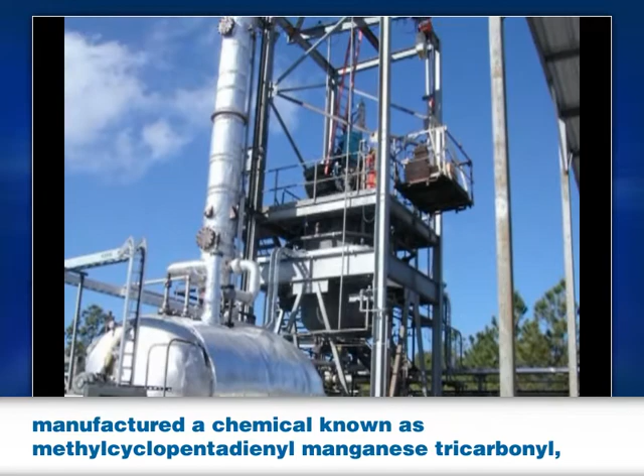Behind me on this concrete pad, there used to stand a structure some 50 feet high that had a reactor vessel in it, in which the company that operated here, T2 Laboratories Incorporated, manufactured a chemical known as methylcyclopentadienyl manganese tricarbonyl, or MCMT for short. The entire structure and reactor vessel were blown away in the explosion.

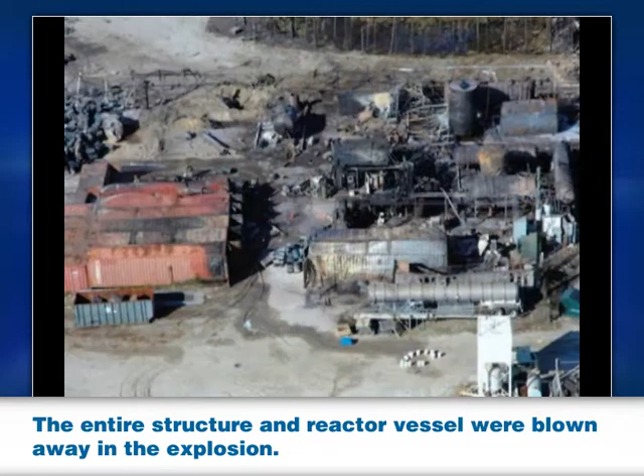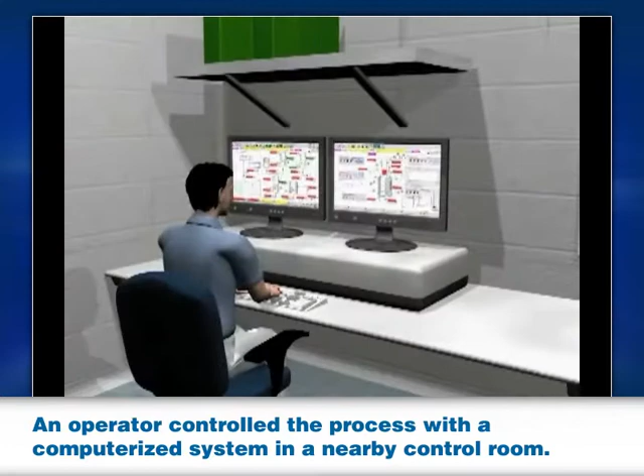T2 produced MCMT, a gasoline additive, in batches using a 2,500-gallon reactor. An operator controlled the process with a computerized system in a nearby control room. In the first step, liquid chemicals and sodium metal were loaded into the reactor, heated, and then mixed with an agitator.

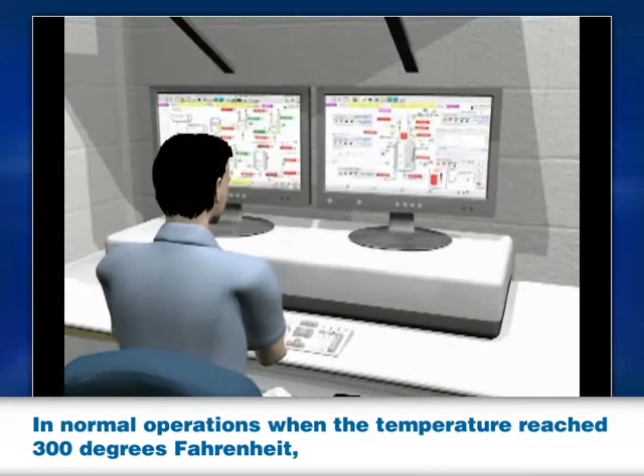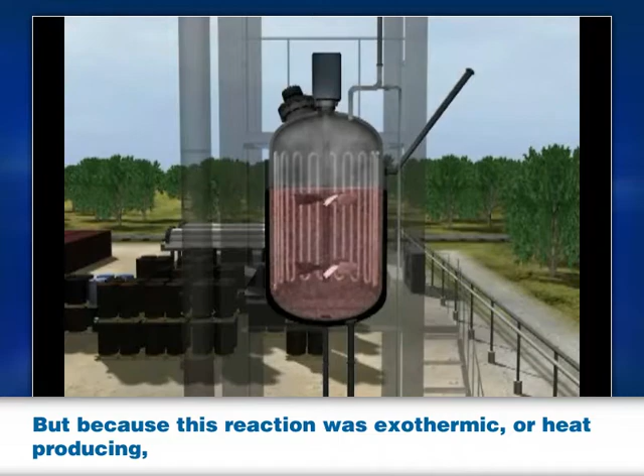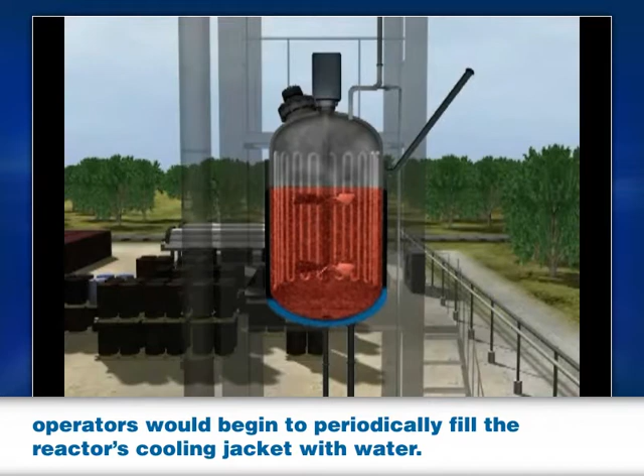The reaction produced hydrogen, which was vented to the atmosphere. In normal operations, when the temperature reached 300 degrees Fahrenheit, the operator would turn off the heating system. But because this reaction was exothermic, or heat-producing, the temperature inside the reactor would continue to rise. At 360 degrees, operators would begin to periodically fill the reactor's cooling jacket with water. As the water boiled, heat was removed, controlling the temperature.

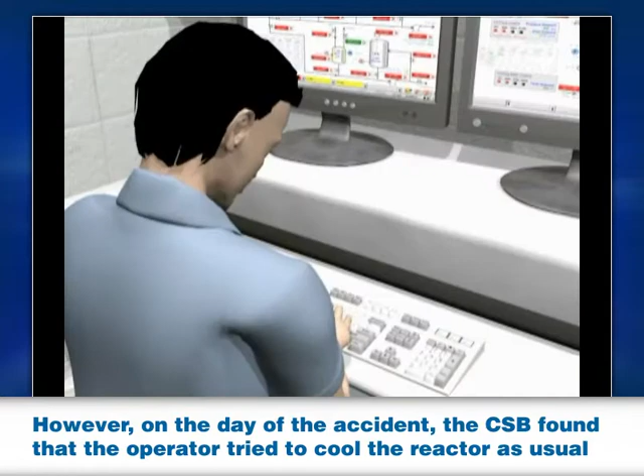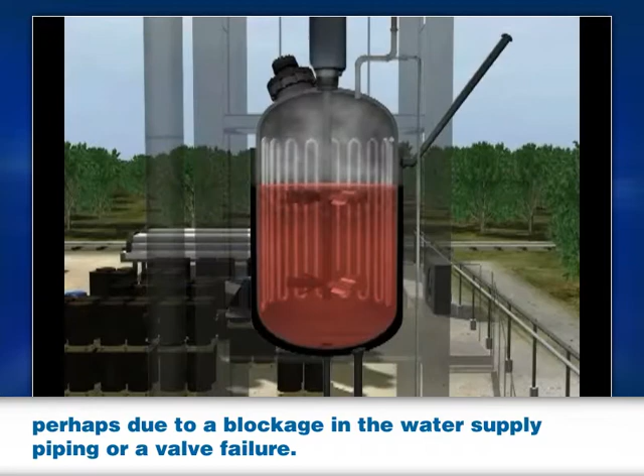However, on the day of the accident, the CSB found that the operator tried to cool the reactor as usual, but the cooling system likely malfunctioned, perhaps due to a blockage in the water supply piping or a valve failure. The temperature and pressure inside the reactor began to rise uncontrollably in a runaway chemical reaction.

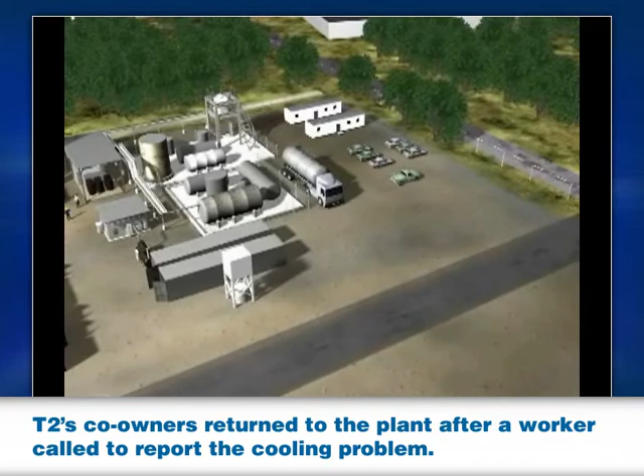T2's co-owners returned to the plant after a worker called to report the cooling problem. While one owner searched for the plant mechanic, the other went to the control room. Concerned about a possible fire, he warned employees to move away from the reactor.

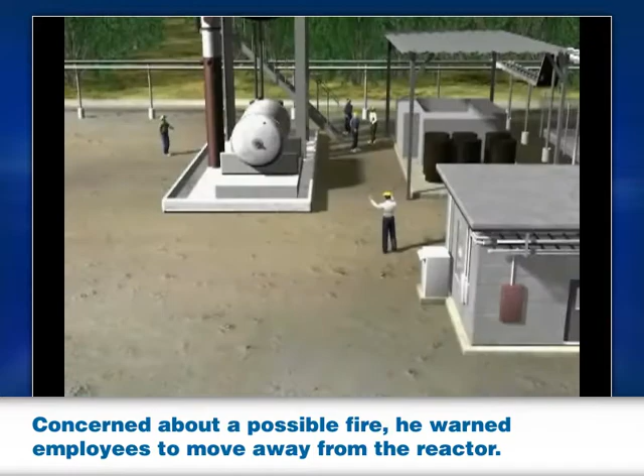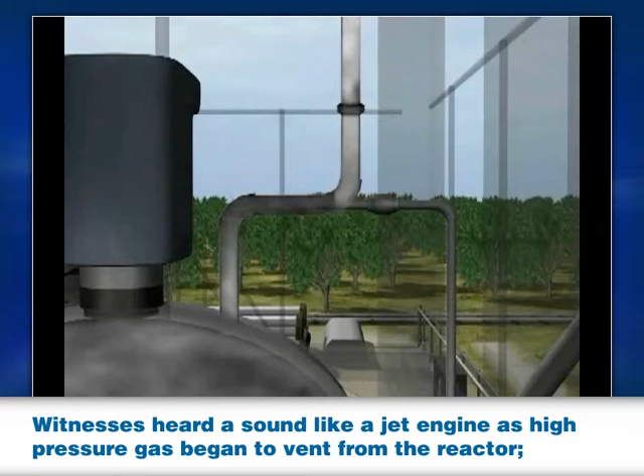Inside the reactor, the pressure was still increasing, reaching 400 pounds per square inch and bursting the rupture disc. Witnesses heard a sound like a jet engine as high-pressure gas began to vent from the reactor. But it was too late. Within 10 seconds, there was a massive explosion, equivalent to about 1,400 pounds of TNT.

The blast damaged buildings over 1,500 feet away. Debris rocketed up to a mile. The co-owner and the operator in the control room were killed. Two operators further away died from flying debris. 32 other people were injured, including 28 at nearby businesses.

This facility housed multiple types of chemicals. That was a kind of a mass storage of everything you can think of, and it was all mixed together and it was all burning together. And from our perspective on the hazardous material side, it makes kind of a worst-case scenario.